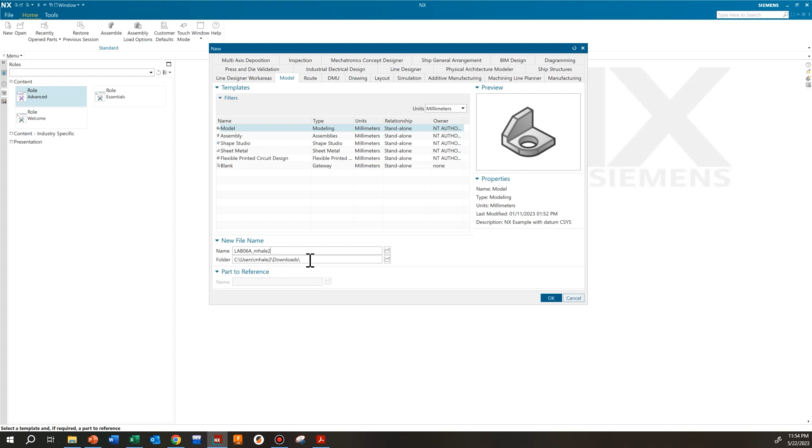Make sure that you have NX in the advanced role. We'll go to new model. It's going to be a model. We're going to be in millimeters. And this is going to be lab 06 A underscore mhale2. So for this one, we're going to do a model and a drawing. So make sure that you label your files correctly and save it to a location you can access later. And we'll hit OK.

All right, so we're going to create a sketch. And I want to start on the front plane. Gonna hit OK. And we're going to start sketching from this view here.

So I'm going to start with this large circle, and the 76 millimeter hole I'm going to save for afterwards, so we're going to do that with the hole command. Same thing with this 20 millimeter hole through here and the 28 millimeter hole in this orientation. Those are all holes, and we are going to use the hole command for those. So we'll start off with this, and then honestly, I'm going to move around and then add things in as we go.

Well, let's go ahead and start doing this. So I'm going to create a circle with the center of the circle to be at the origin. It's a diameter of 116.

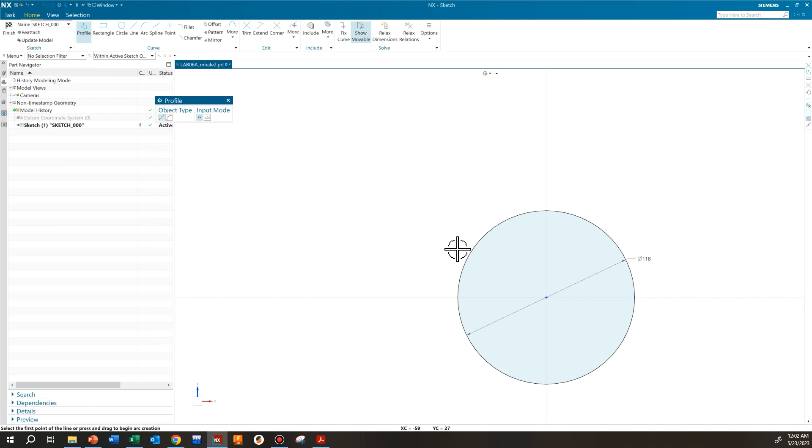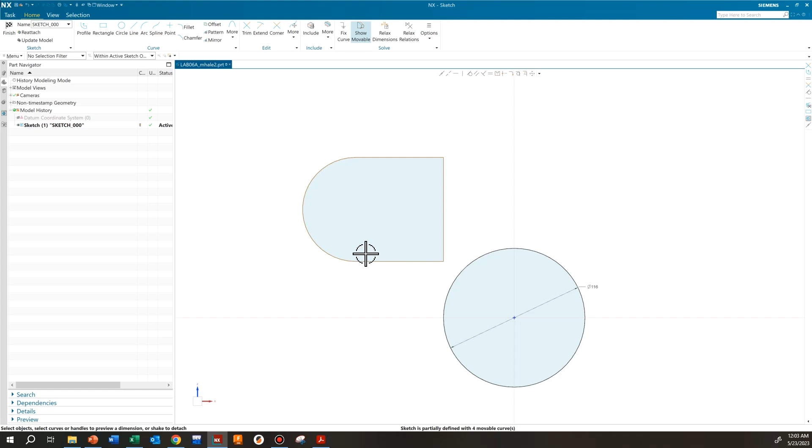And then over here we have this area here that's connected with this webbing, but I'm going to go ahead and draw this first, just somewhere over here. And I'll dimension it.

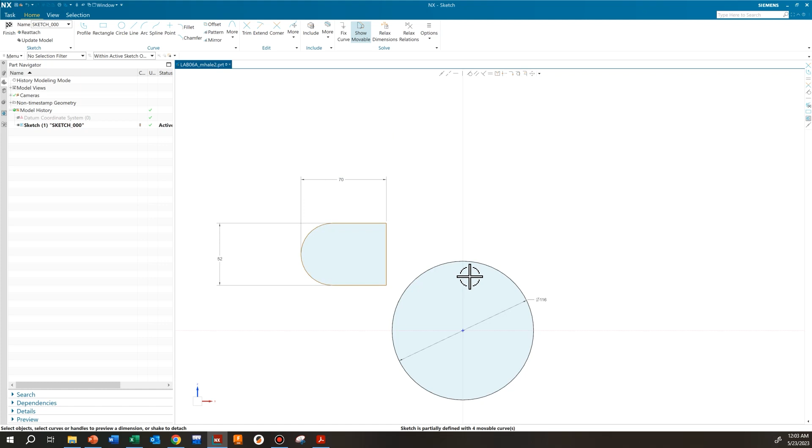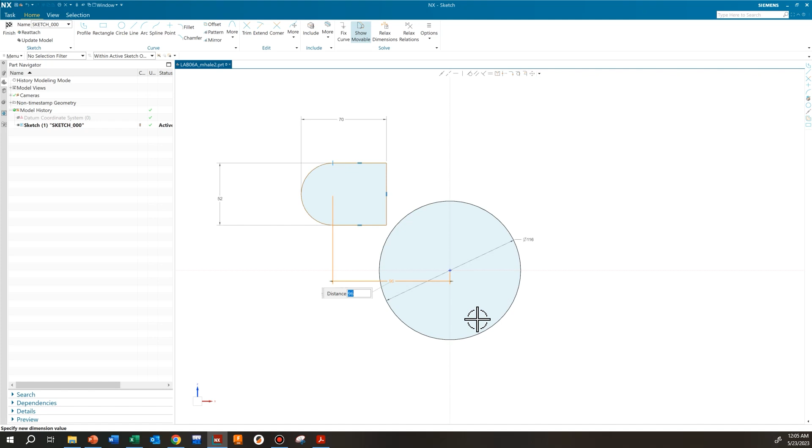And then I know it's somewhere over here, and that from here to the center of this arc, this is 96. And under the height, is 56.

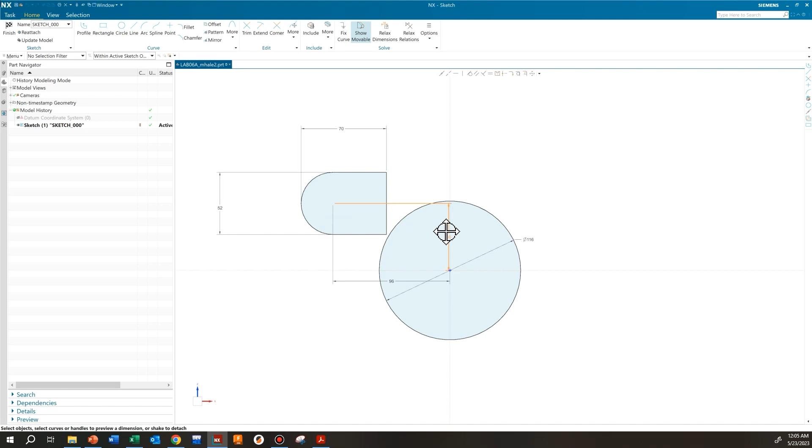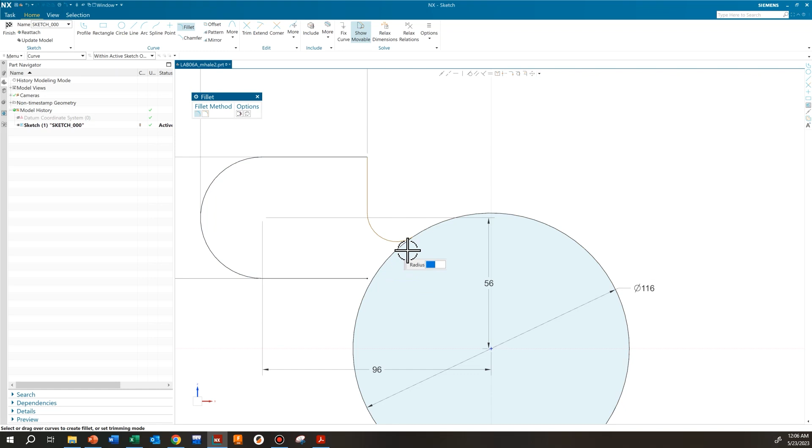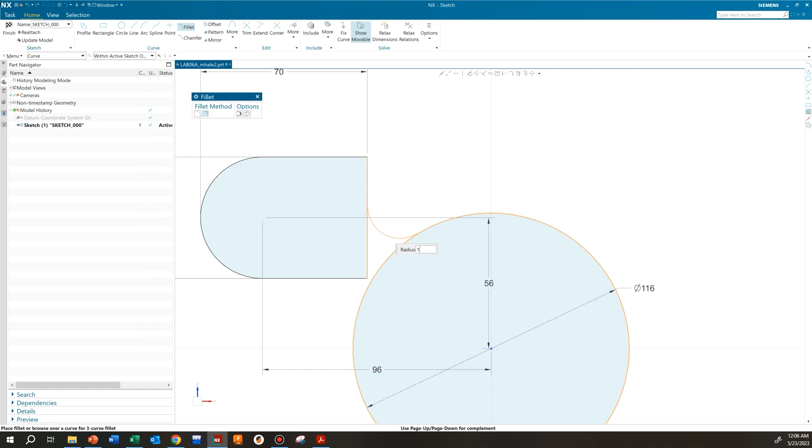And we have these R16 fillets that are right here. So if we go to the fillet command, we have a couple of options we can choose from, a couple of methods. So the first one is trim and untrim. So if we trim and select our components, then it's actually going to delete our lines that we've created. That is not what we want. What we want is the untrimmed. And then we can come in here and select - we have a 16 radius fillet on both sides.

Now we've got most of this side done. We need to come back and address a couple of things before we're done with the sketch, but I want to move on over to this side because we have this top line that extends over, and we have a whole bunch of dimensions here.

So we have this virtual line that's going through this center. You can see we have this center line here, and we are referencing a lot of stuff on this center line. So what I'm going to do is I'm going to first draw this center line, so then I can reference everything off of it. I know the center line is 172 millimeters away from our origin, and we can go from there.

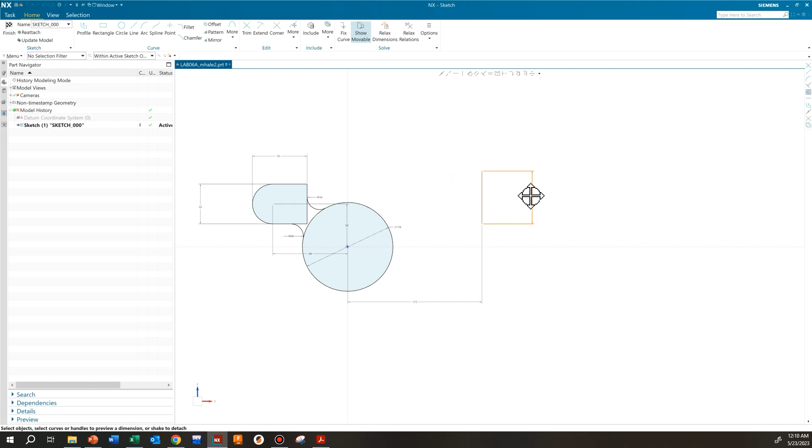I'll do a line, just somewhere over here. And I'm going to say that it is 172 millimeters away from our origin. And this is going to be reference geometry. So I'm just going to go ahead and say that it is not 703, it is 70 millimeters long.

And I will position this - if we look back at our drawing, from the origin to the top of this section is 64 millimeters. So I'll go ahead and position this, that point to the origin.

As 64 millimeters. And I'll go ahead and turn this into reference geometry.

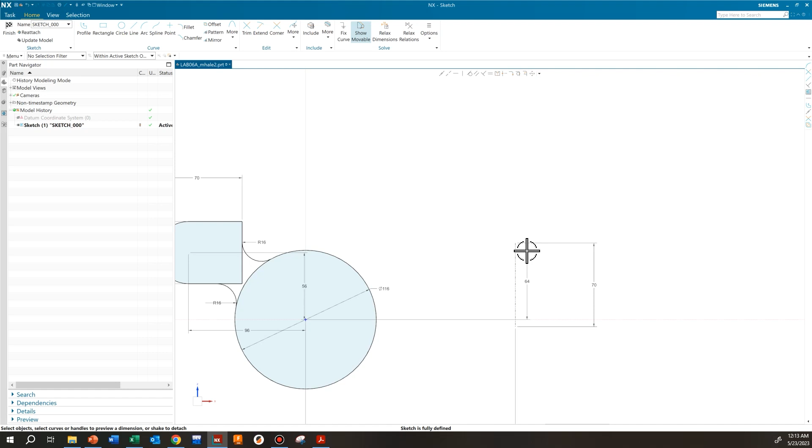Now we can make our line from this top point through that reference geometry that we just made. We're told that this line continues on, and there is a virtual intersection that is 6 millimeters from the top of this point to where this line intersects. We've already positioned that top point.

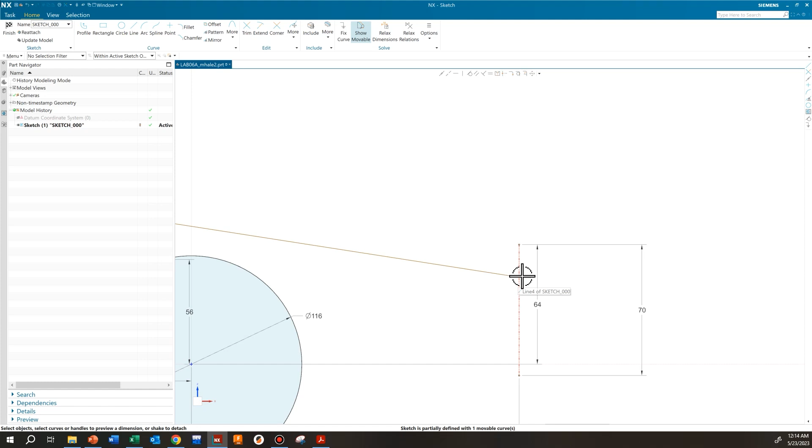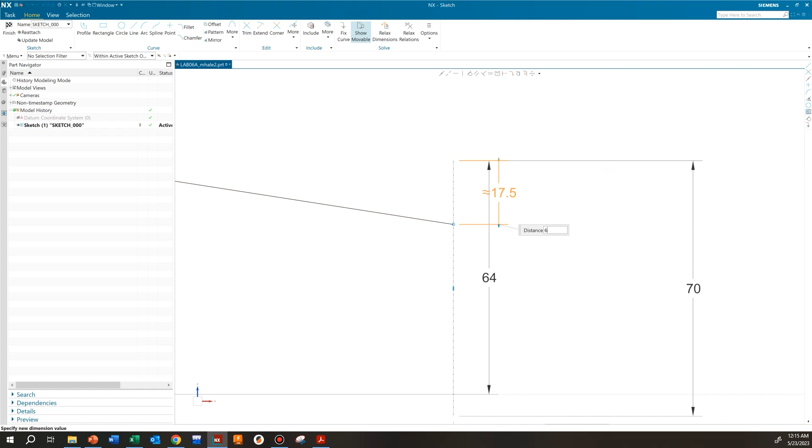So we will trim this, and we want this endpoint. Make sure that we get the endpoint, to the point, the top point of the reference line. We want this to be 6 millimeters. Make sure that you get the endpoint, otherwise you might get a dimension that is perpendicular to this line.

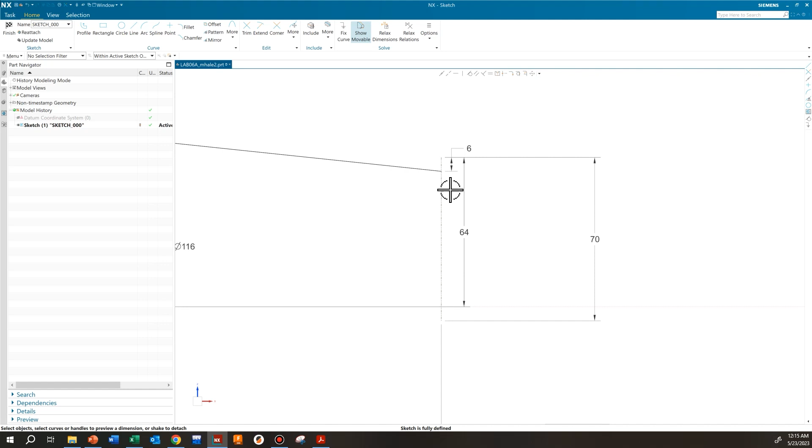We don't want that because that's going to be at a diagonal to this point. We want the 6 millimeters to be on the same axis as this point. So we need to trim off the line, have an endpoint, select that endpoint, and then select the top of the reference line. So we have this line going through.

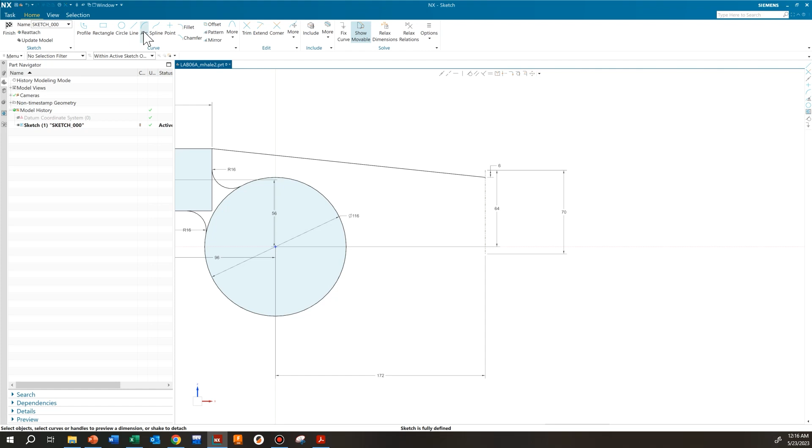Now let's look at this section here. We have the center line that goes through, and we're told that the center line of these two lines here crosses 16.4 millimeters from this top point. So we can create another line. We want the center here, and I'm just going to cross through that reference point.

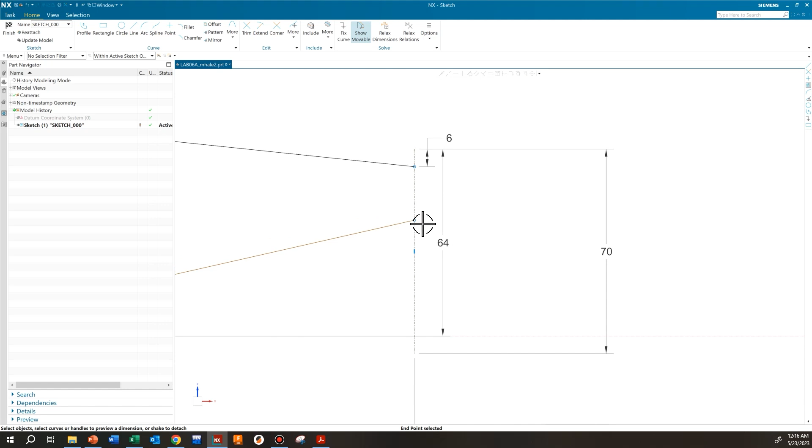I'll come through, I'll trim this off. And just like what we did up here, we're going to do the same thing. We want to make sure that we get the endpoint, or the start point of this line. And this is going to be 16.4 millimeters.

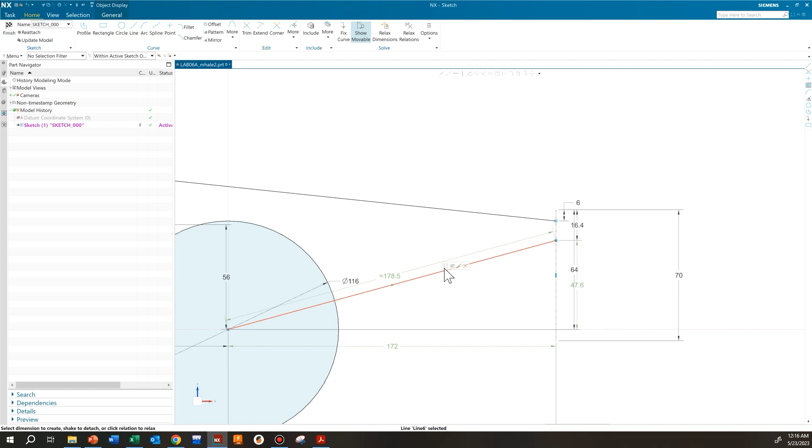This, however, is another reference line. We look at our drawing. This is the center line that's actually dimensioned from this edge here. And then we're told that the actual lines are 10 millimeters away from that center line, 20 millimeters total. But that center line goes through the center of that 20 millimeter beam right there. So to create these lines...

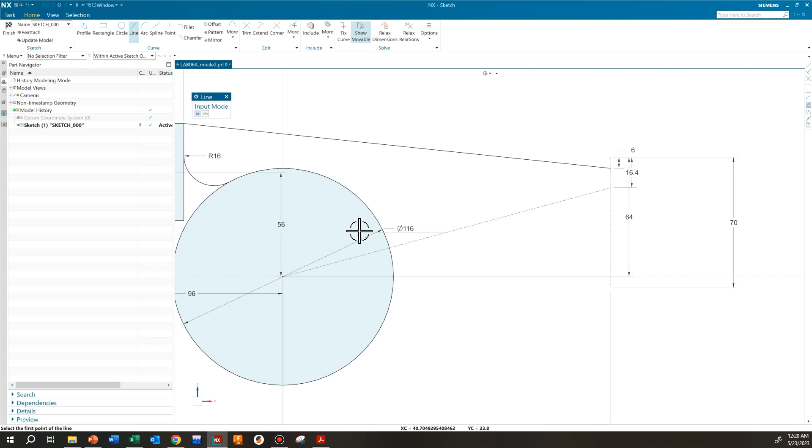What I will do is I will create lines. Again, I can spend the time to try to get the line started on the edge of the circle, or I can just come in and start our lines from the inside of the circle, and we'll use the trim command to trim off the excess.

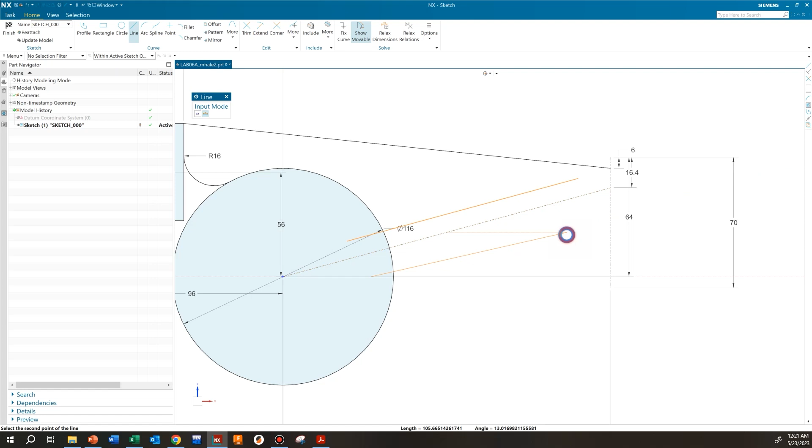So I'm just going to get the line started and make it look just like that, so it starts from the inside of the circle and doesn't go past our reference line. Same thing for down here, start inside the circle and then I don't want it to go past our reference line.

So then I'm going to come here to our constraints, and I want to say make parallel. I just want to make sure that the lines we created are parallel with our reference line. So I'll choose one of our lines and I'll choose the reference line, hit apply. I'll choose one of the lines, the reference line, and then hit OK, just to make sure that both lines are parallel with that reference line.

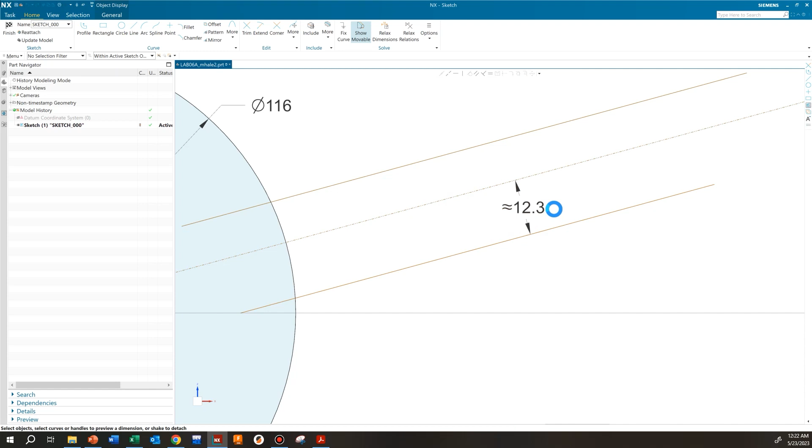Then I want to dimension where these lines are going to be located at. They're both going to be located 10 millimeters away from that reference line. So I'll click on the reference line, click on one of the lines, 10 millimeters. Same thing on the other side. We've got 10 millimeters.

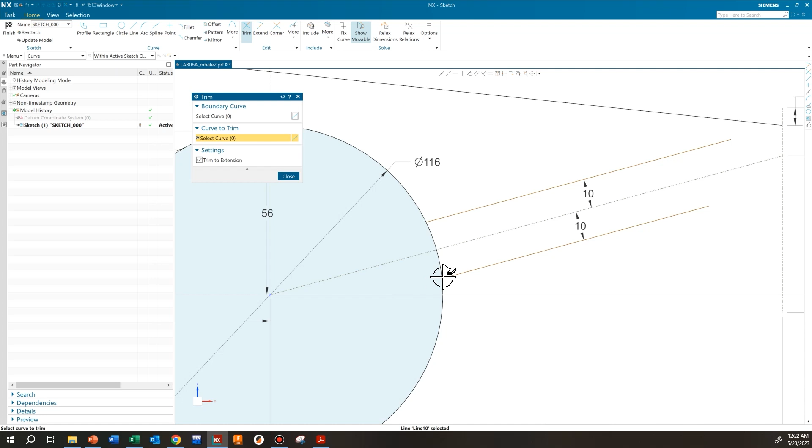And then now what I want to do is I'm going to come up to the trim command and I'm going to trim off these lines at this arc. And then I'll come up to the extend command and I'll extend these lines out.

Now let's look back at our drawing.

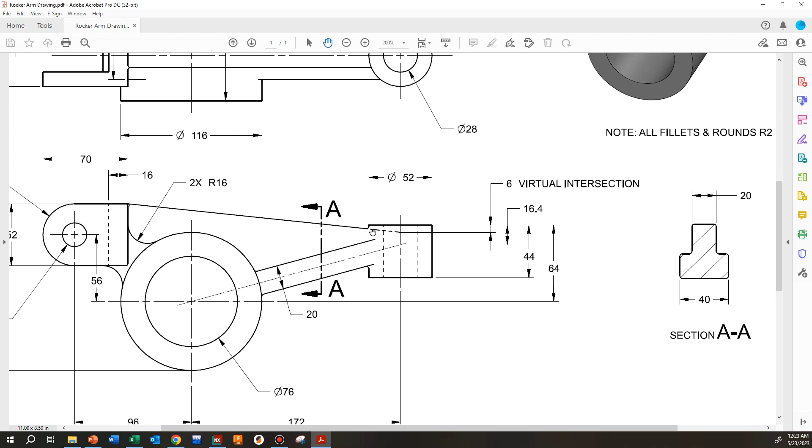So we've got the circle, we've got these fillets, we've got this feature line, we have these lines. We don't have this, but in this view we don't really have any dimensions for that. That's all in the top view. But in this front view, the only other thing we have is this hidden line.

We are actually going to go ahead and draw that in, because the sketch we've created right now is going to be in the center of our part, and we're going to symmetrically extrude the features from this sketch. So we need this line so that we can dimension this feature. We're going to draw this in, and that's going to be it for this sketch, and then we can start extruding some of these features.

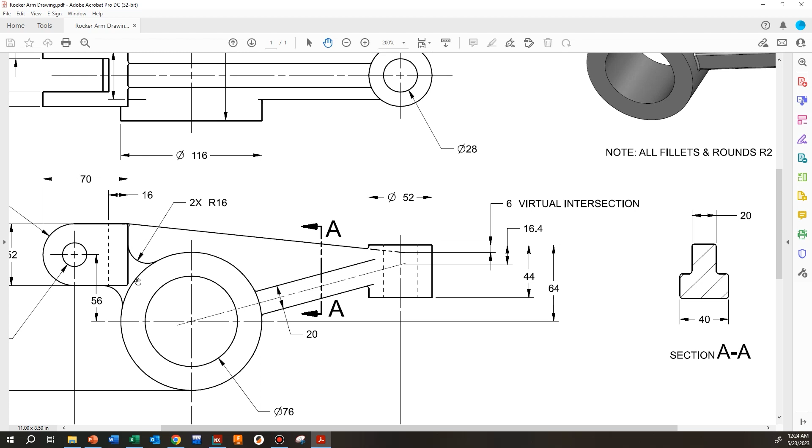So we want a line that is 16 millimeters from this edge. Go and draw that line, dimension this so that it is 16 millimeters.

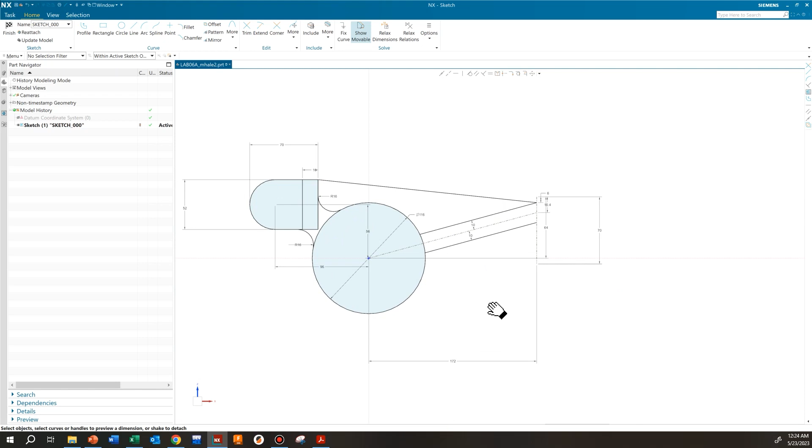All right, so the last thing we need to do is come over to the right part of our model. Right now we don't have a defined boundary, and we need one. So I want to create a line that connects this top line to this bottom line.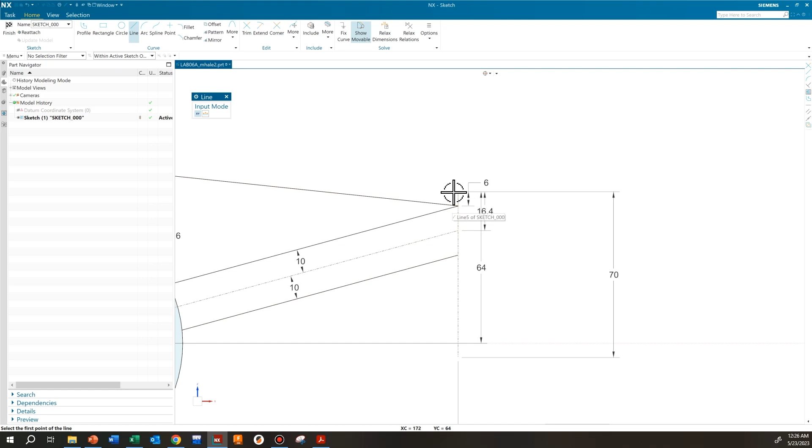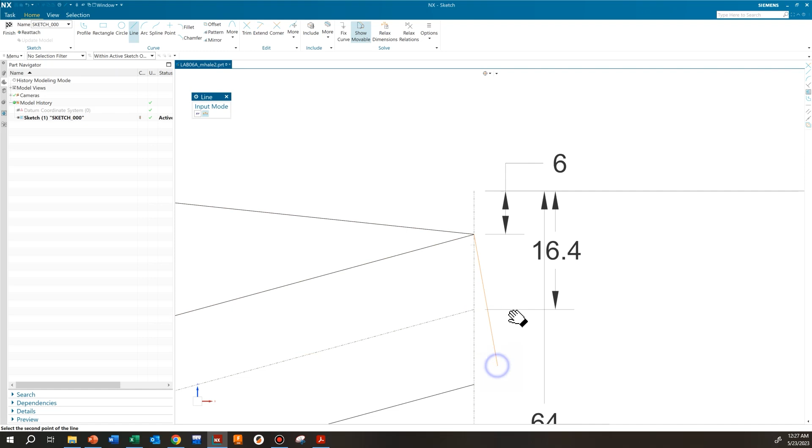So I'll come over here, and I want the endpoint for line 5. It's important to grab that line because that's the top one. And then there's line 9. Then I'm going to come down here to the endpoint of this line, endpoint of line 10. And that's where we want to have our line.

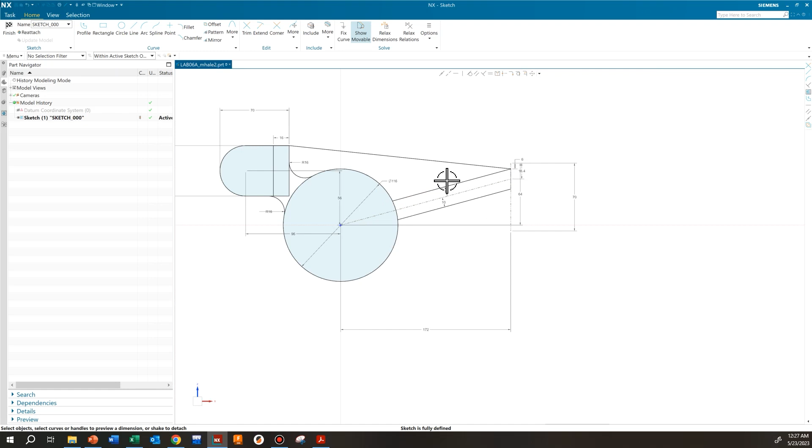It doesn't look like anything has changed, but we will be able to actually create boundaries now. So we can go ahead and finish this sketch. And now if we look back at our drawing, we can move up to this section and this section.

So our sketch is essentially down the center of this part. We're going to make symmetrical extrusions, and we're also going to mess with the starting point on some of the extrusions, which we haven't done before.

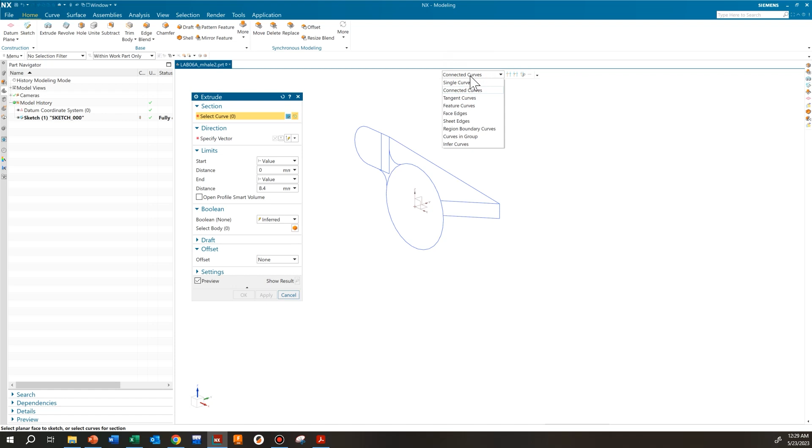So let's start with this 116 diameter round piece that we actually started our sketch with. We are going to go to extrude, but we're going to do something different. I can select the round section with just connected curves, but that's going to become difficult later using this method. Instead we can select what we want to extrude using region boundary curves, and that allows us to actually select the section we want. See how I can select all of the sections that we've made?

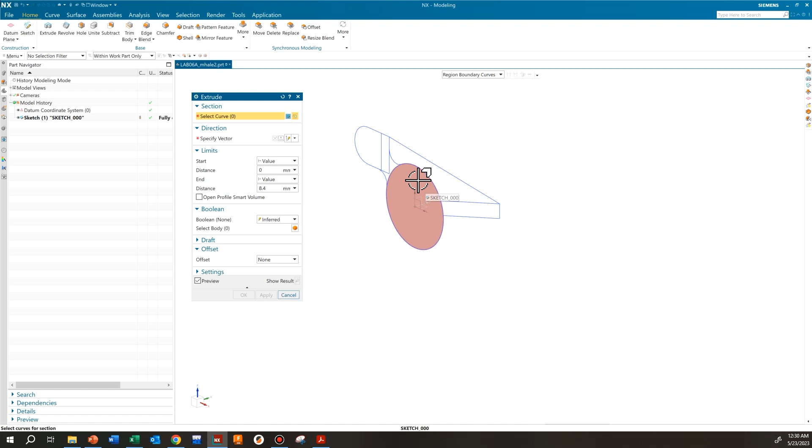So we can go in and specify for this boundary how much we want to extrude, and this is how we're going to extrude all these individual components. We're going to start off with our circle, and remember, we want a symmetric value here. It's going to be 76 millimeters. Just go ahead and hit OK.

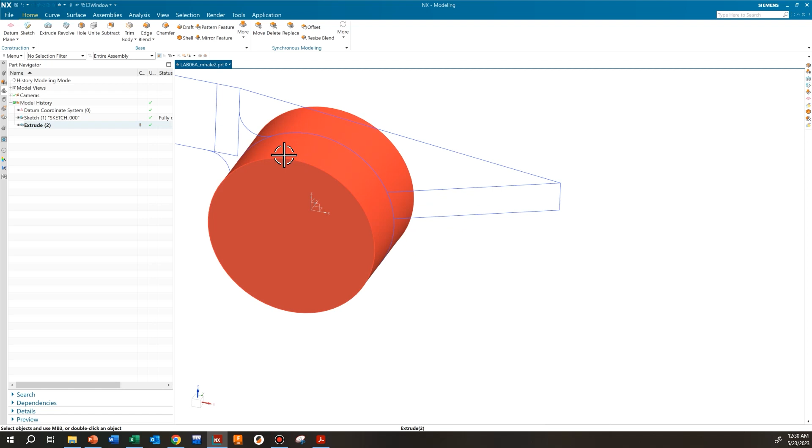And we're going to move on and kind of piece this all together with the extrusions. So we got the 76 millimeter. This webbing, the fillet that we did, is the 40 millimeter.

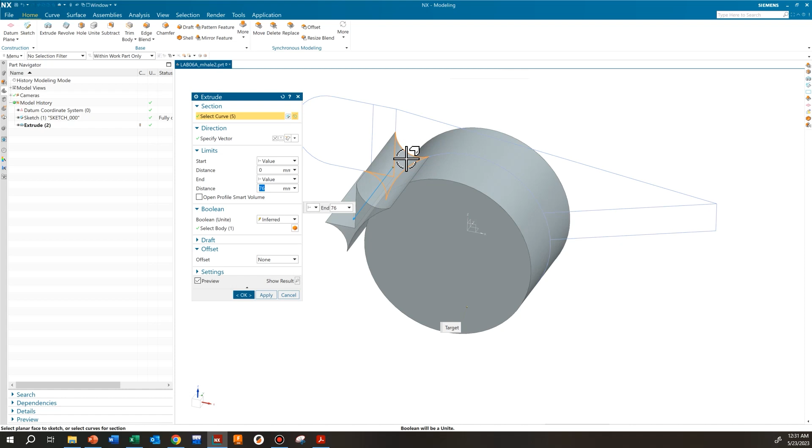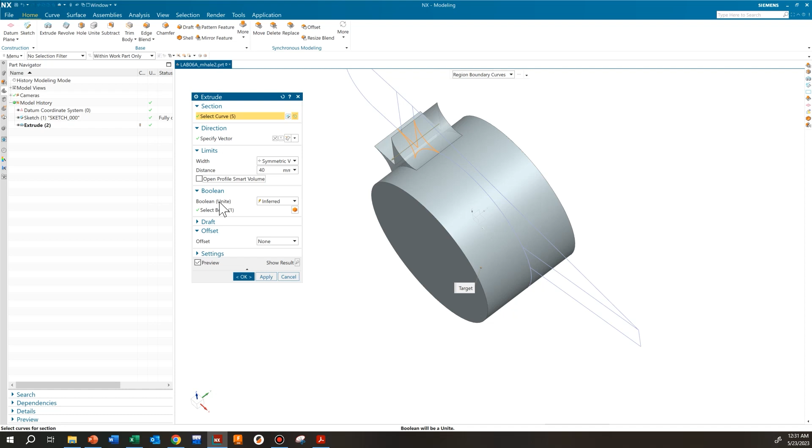Go back to extrusion, we're still in region boundary curve. We want this to be symmetric. This is 40 millimeters. We want to make sure, though, that we are uniting all these together — if we don't unite, we're actually making multiple solid bodies. So we want to make sure that we are uniting all these together. Hit apply.

This web section here, which is going to be this top area, and then this beam that we created, is actually dimensioned over here in section A. We have a section view that's split right here, so we're actually seeing this top webbing area and then this bottom beam that we have. So the top webbing is 20 millimeters and the bottom is 40.

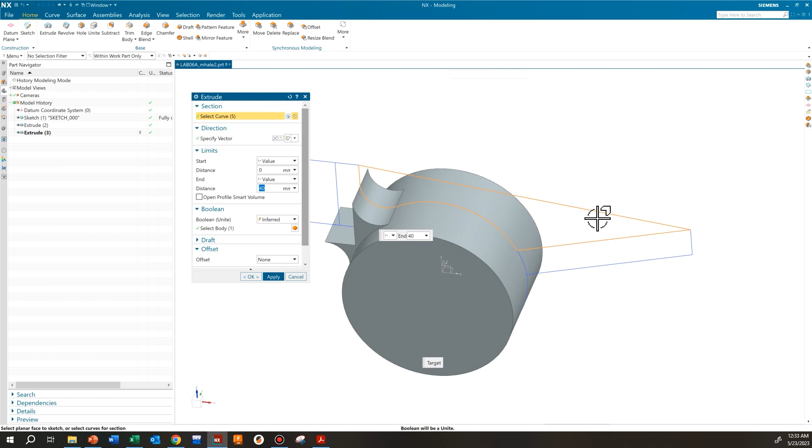We can select this top web right here. Again, we want to go to symmetric value — this is 20 millimeters. Make sure that we're uniting. Apply.

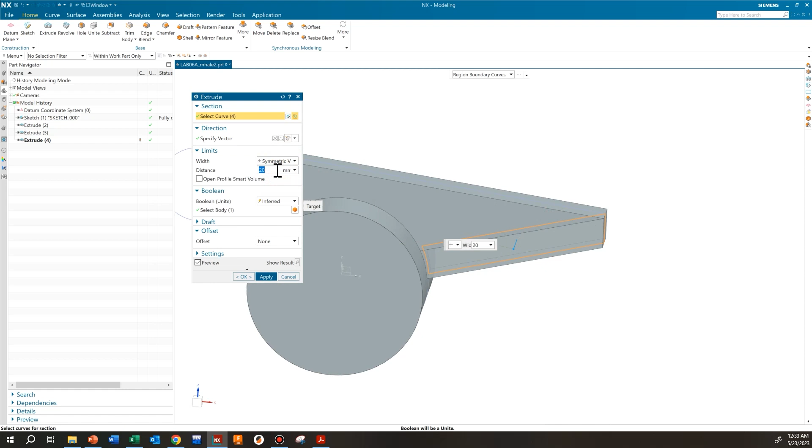Select the bottom, symmetric. This is 40. Hit apply.

And now this area is where things start to change a little bit. This is why we specifically wanted to put in this rectangular area, and why we wanted to put in this line, because we have this dimension up here. So we have this cutout area.

The edge of this cutout area is that line that we put in. So this whole section right here is still kind of what we've done before, but we don't have an exact dimension for it. What we know is that we have a 12, a 28, and a 12, and that is the total distance that it's extruded. Just like we've done always, when we have to add things together or divide things, we're not going to add these numbers together outside of NX.

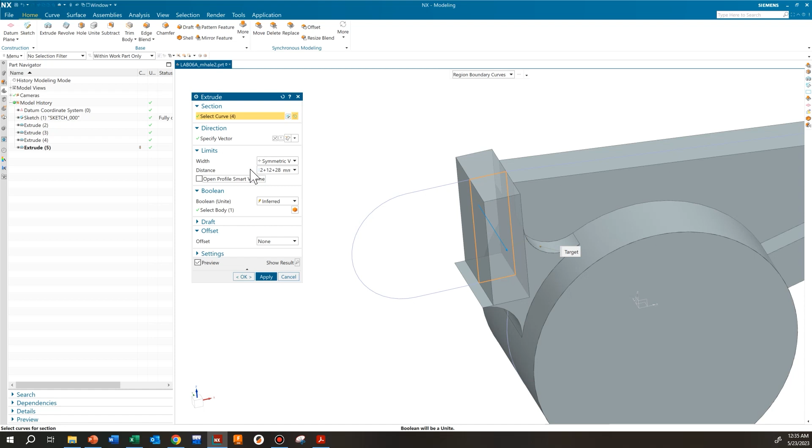We're just going to put them in NX and have it add it for us. That way, everything we've done is documented. So I'm going to choose this section here, symmetric value, and I'm going to add 12 plus 12 plus 28. Make sure I'm uniting, and I'll hit apply.

And then for the pieces that are on the top and bottom here, again we're going to do the same thing. We're not going to do any math outside of NX, we're going to leave it all up to NX. We know that this middle section has a 28 millimeter gap, but we know the thickness of each of these sides is 12 millimeters.

So we're going to change our starting point to be half of 28 millimeters. So the starting point is going to be 14 millimeters away from this middle section, and then we're going to go to the 12 millimeters thickness. Then what we're going to do is actually just mirror this section. So rather than making this symmetrical, I'll select the curve.

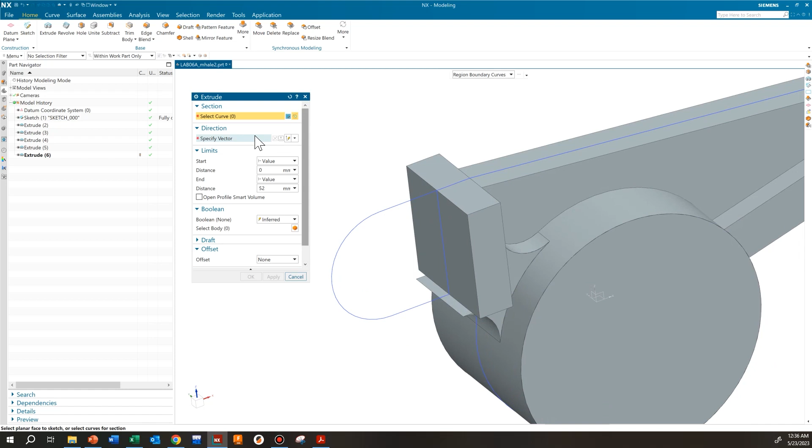My starting point is going to be 28 millimeters divided by 2, so that's the 14 right there. The value that I'm going to go to, it's not going to be a value, it'll be until extended. And I'm going to select that wall that we just made, and I'm going to hit OK.

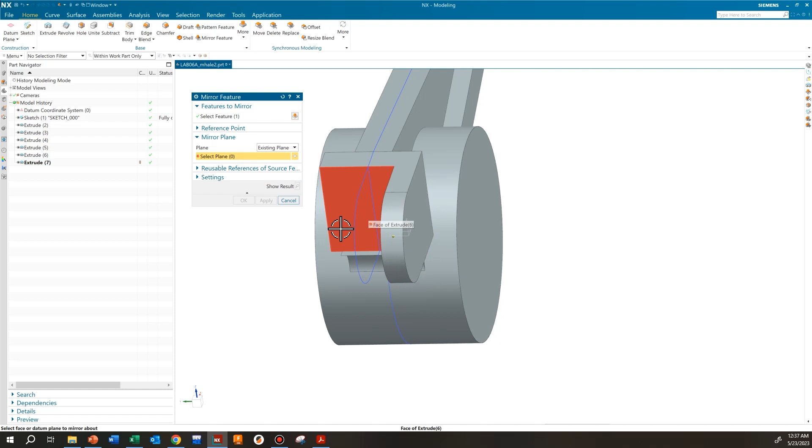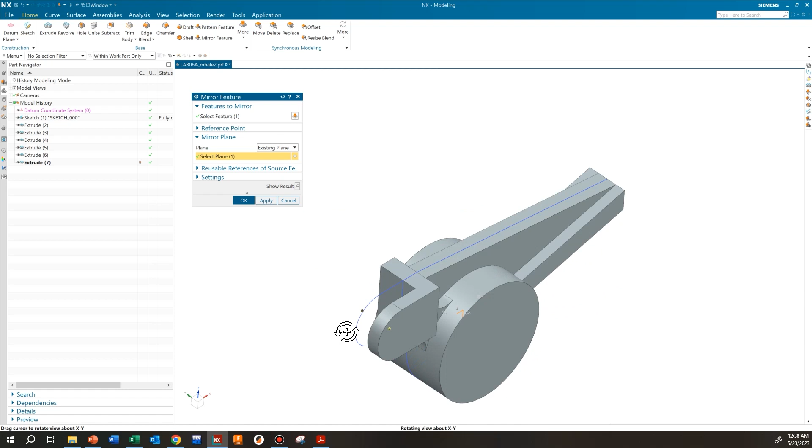Because then what I'm going to do is I will mirror this feature, and the reference plane is going to be the plane that we drew the sketch on, so it's going to be that XZ plane. And I'll go ahead and show the results, make sure that everything is correct, and I'll go ahead and hit OK.

All right, so we've done everything that we can do as far as the extrusions go. The other thing that we need to do is make this feature here. So we're told that the outer diameter is 52 millimeters and the top of it is 64 millimeters from the origin.

There's lots of ways to do this. What I'm going to do is actually create a plane along the bottom here, and then we can sketch on that plane and extrude it up.

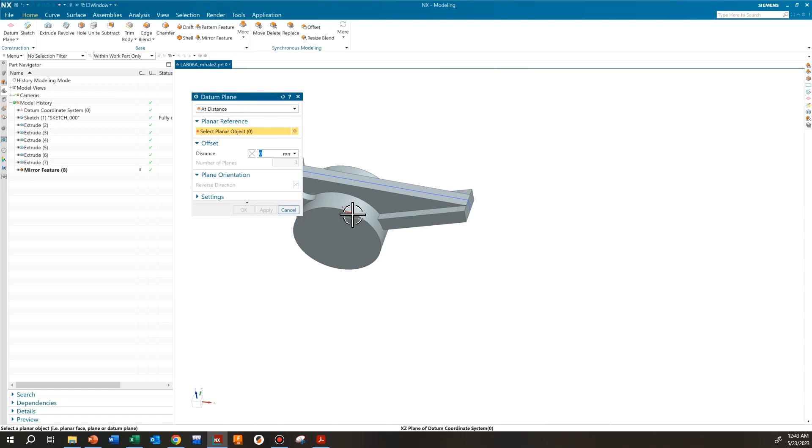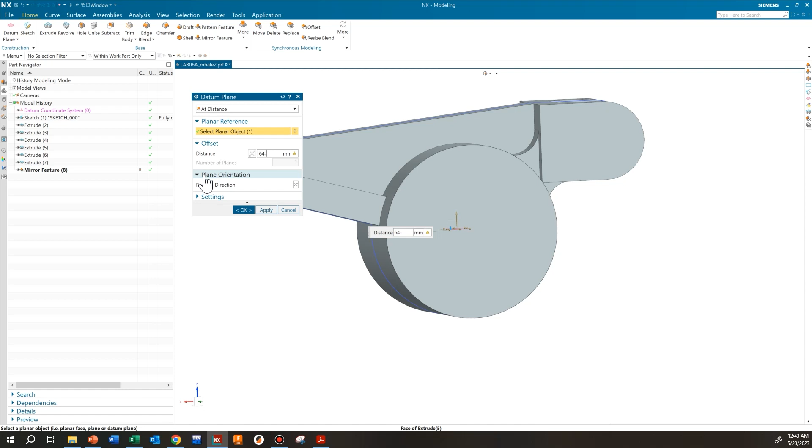So I'm going to create a datum plane. I want to add a distance. The reference plane is going to be our XZ plane, and the distance that I want is 64 minus 44, so it'll be 64 millimeters minus 44 millimeters.

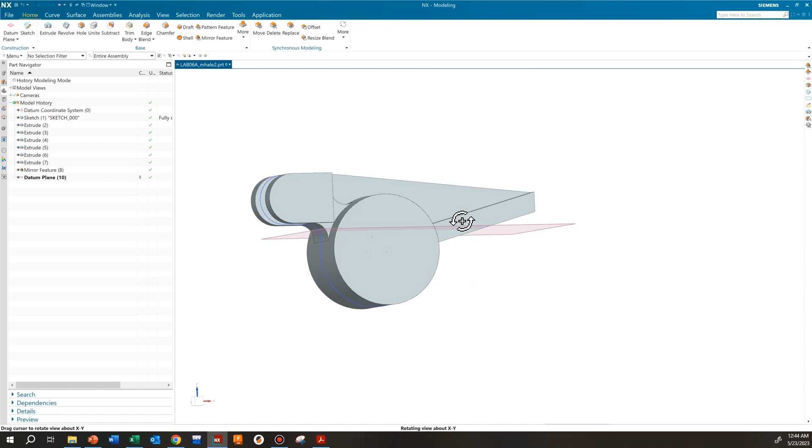And I'm going to go ahead and enlarge this just so that I can see it a little bit better. So now I have a plane created at the bottom of our hole over here, or this section of the rocker arm. Now I'll go ahead and create a sketch on that plane.

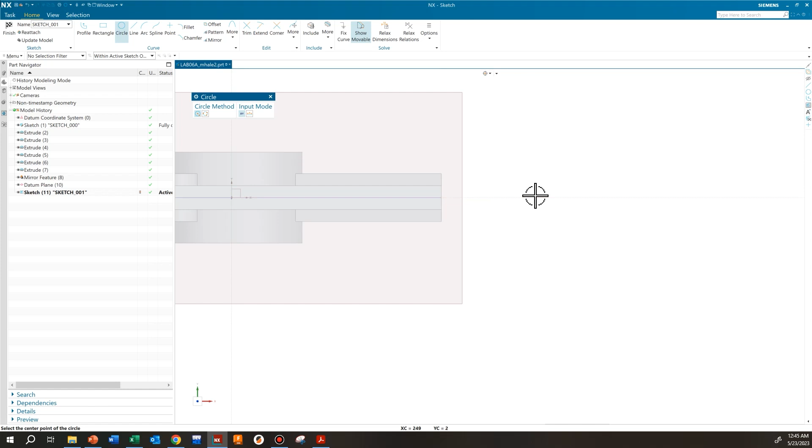I'm going to start with a circle, and I want the circle to be on this horizontal axis right here. See how it's snapping to that axis? I'm going to go ahead and constrain it to that. Look at the drawing, it's 52 millimeters in diameter, so change this to 52.

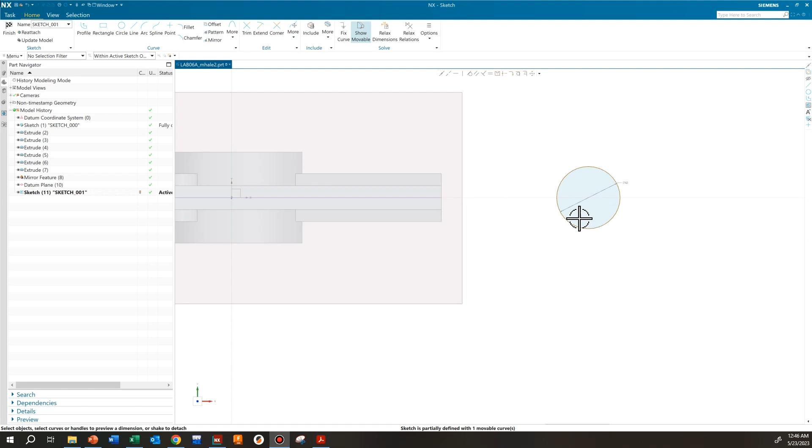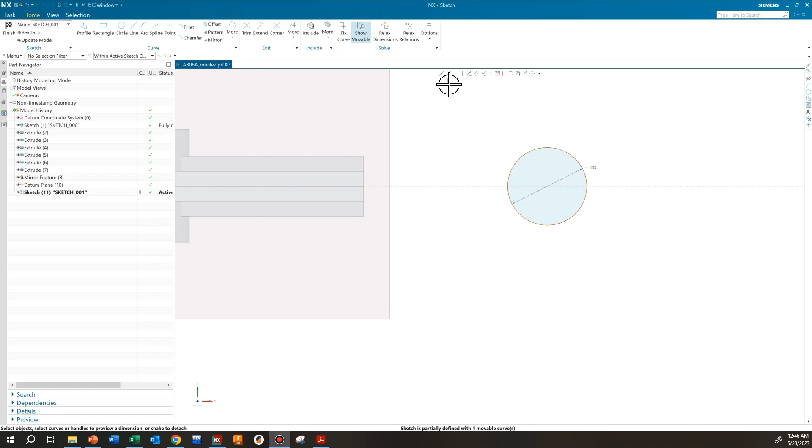Now what I want to do is constrain the center of this 52 millimeter circle to be on the same line that is created here. Remember, we dimensioned this point already to be where the center of the circle is located. So what I'm going to do is a make coincident, and I want to choose the center of the circle, and then I want to select one of these lines.

If you cannot select this line, make sure that you are within work part only. If you're within the active sketch only, you won't be able to select it. So we want to be within work part only, and we can just select one of those lines and hit OK.

So we have been constrained to the horizontal axis that's right here, and then also we made a coincident on this line that's already been dimensioned where this circle needs to be. The sketch is fully constrained, so we can go ahead and hit finish.

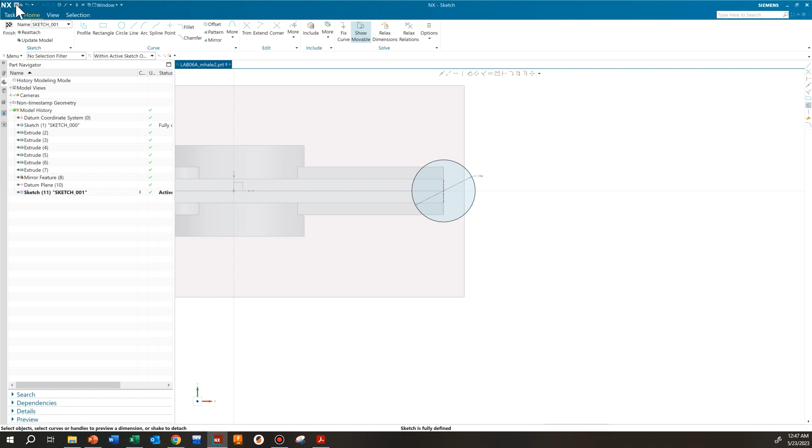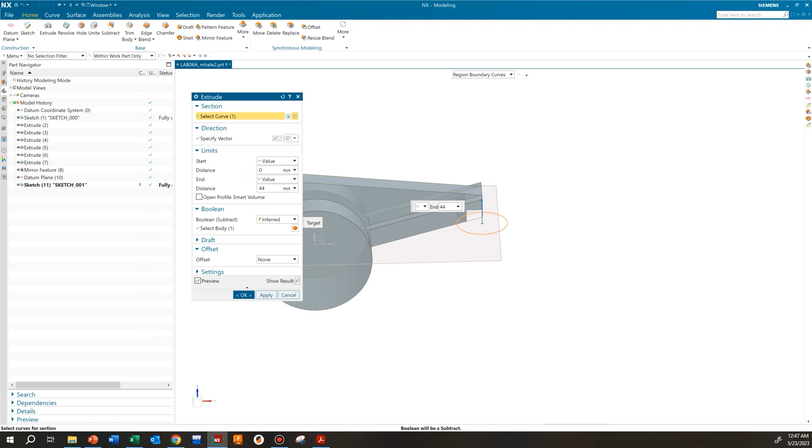And we can extrude this. Our start value is going to be 0, and then the distance we actually want to go is 44 millimeters.

Notice that we are subtracting. We don't want to subtract. What we want to do is actually unite here. We'll go ahead and hit OK.

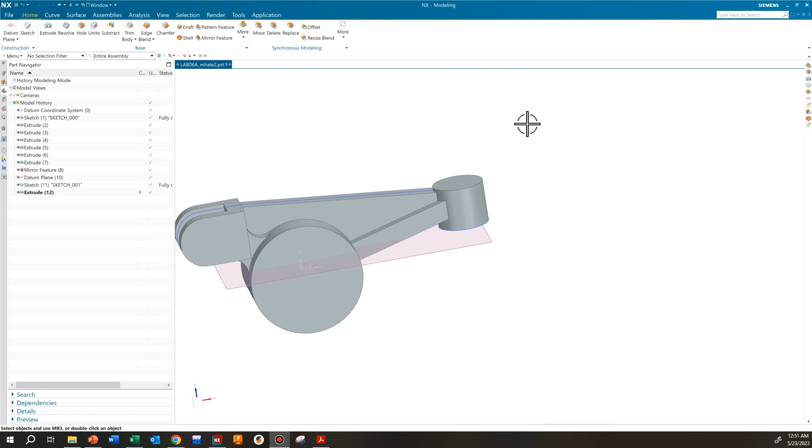Now we've had a whole bunch of different extrusions where we had to unite a lot of geometry, and there's a lot that could go wrong if we overlooked one of the unites and accidentally did a none. We'd actually have multiple solid bodies here.

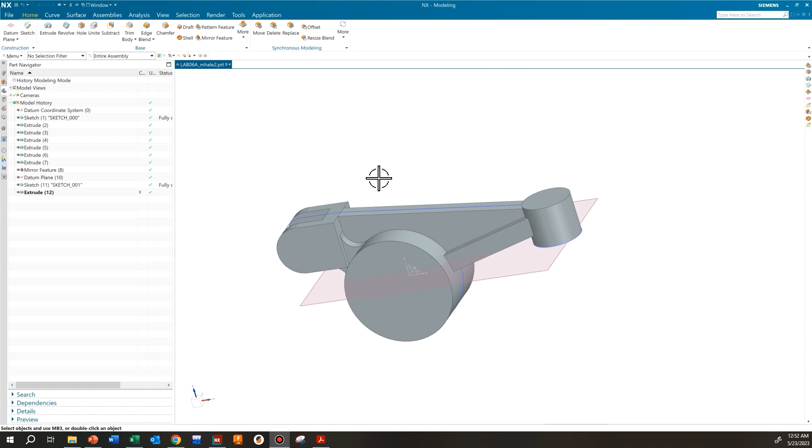A quick check for whether we have one solid body or multiple is to go up to unite. If all of our geometry is selected when we go to select the body, then we actually have one solid body. However, if when we hovered over our part one section was grayed out, or maybe multiple sections were grayed and we weren't selecting those bodies, then we would have multiple solid bodies.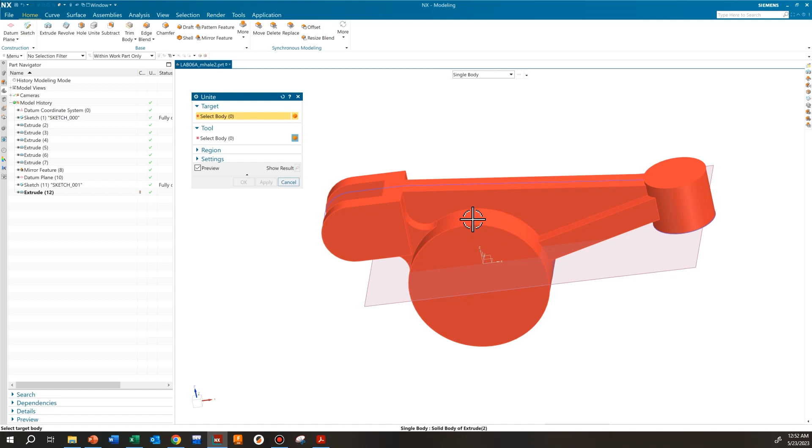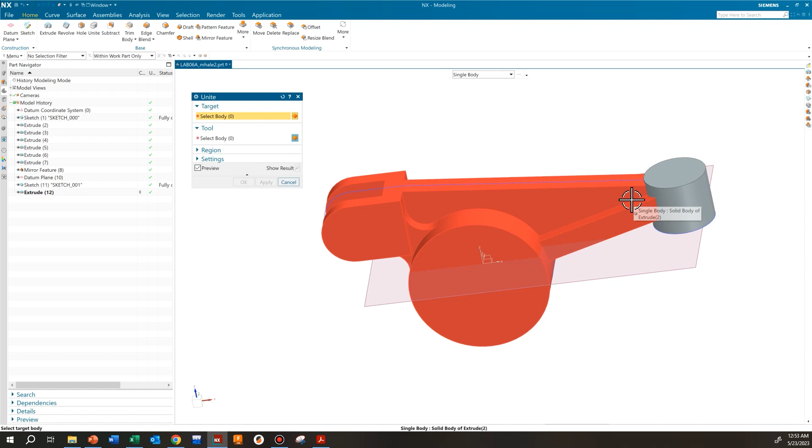So let's say that last extrusion we did - let's go back - and we accidentally hit none. Right now it looks the exact same, but when we come over to unite, see how it's not being selected? That's an indication that we have two solid bodies here. So that's a good check to see whether we actually have one solid body or multiple.

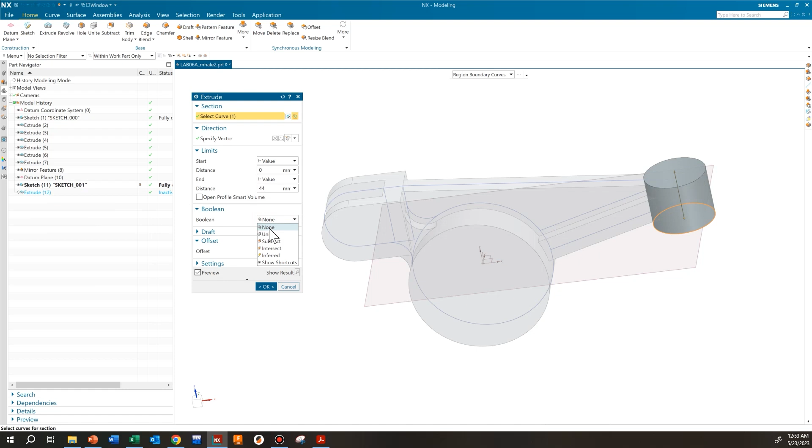Now, of course, we want to make sure that we are uniting all of our geometry together, because all we're doing is adding to our solid body. We are not creating multiple solid bodies here.

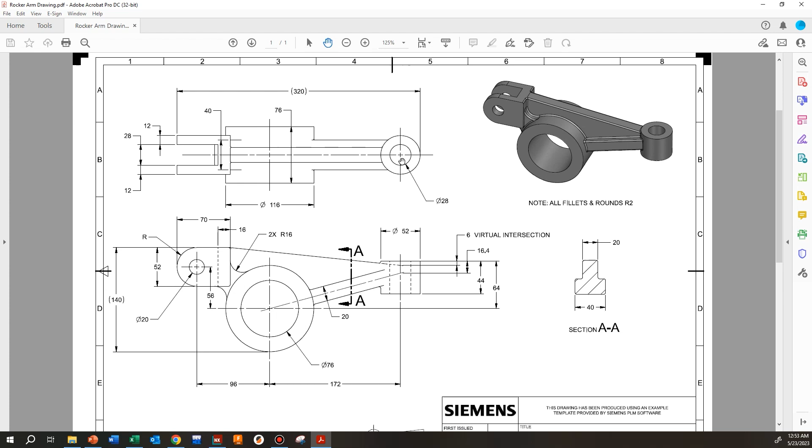So the next thing we need to do is add all of our holes. We've got a 76 millimeter hole here, a 20 millimeter hole, and then a 26 or 28 millimeter hole. So let's go ahead and create all of that.

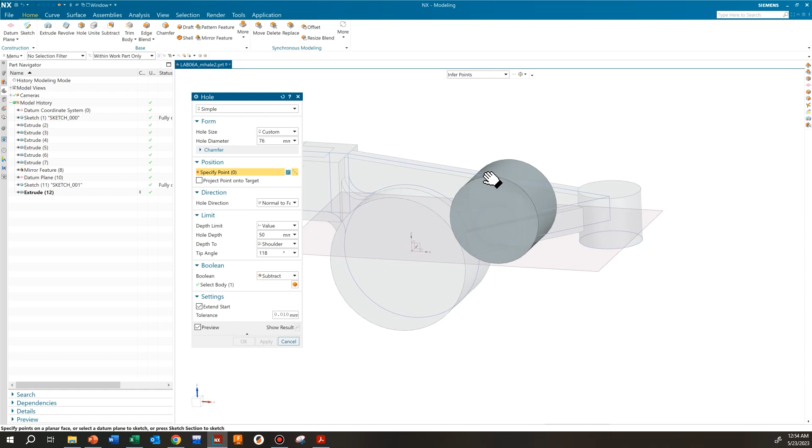So we'll use hole commands for all these holes. This is a 76 millimeter, and a simple hole is fine. We don't need to go into a sketch because all we're going to be doing is the center of this hole, so we can just approach this hole and constrain it to the center. This is going to be a through hole. We can hit apply. Move on to the second hole, which is going to be here.

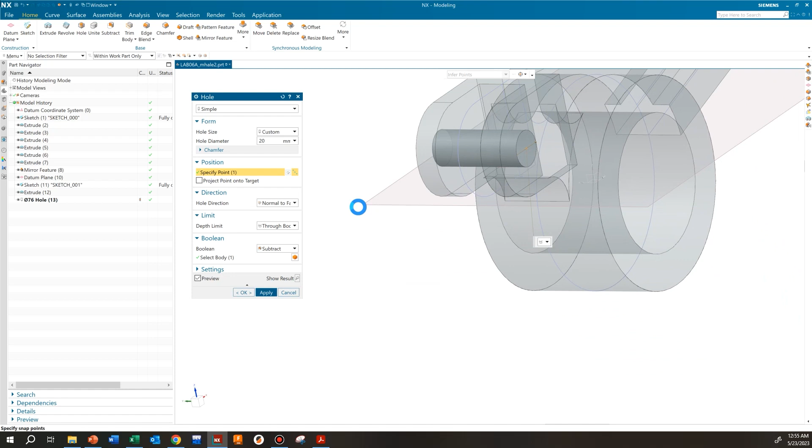This is a 20 millimeter. We can approach this radius, wanting to be at the center of that radius, and again this is going to be a through hole. So the cool thing about this through hole is that it's actually going to split - it's going to go across the gap and continue on, which is what we want. So we can hit apply.

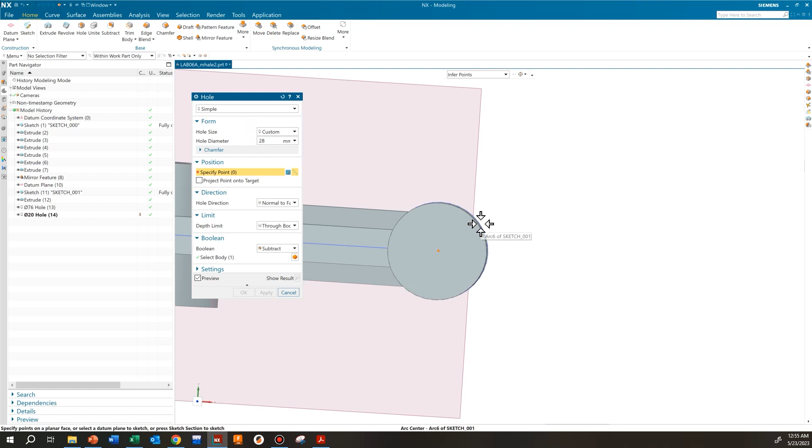And then the third hole is going to be 28 millimeters, and it's going to be at the center of this feature. Again, another through hole, and we'll hit OK on this one because we are going to be done with our holes.

Now, the last thing we need to do for the model is we have this note over here that all fillets and rounds are R2, and we have edge blends for all of this geometry here. So we need to add these edge blends to our part.

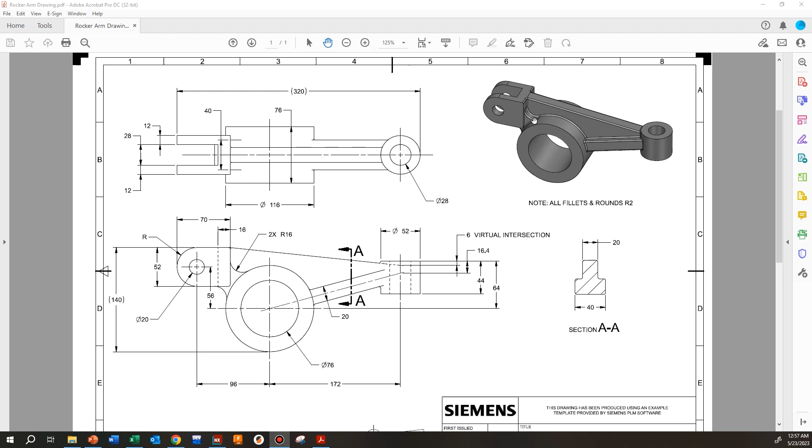All right, so now we want to add edge blends to the part, and then we will start the drawing. We'll warn you that some of the edge blends can be a little difficult to put onto the part, and if you come across these difficulties, I suggest you just try a different order. Sometimes there's no problems at all, sometimes there are problems - it all has to do with the order that you select the lines that are going to be edge blended together. So I'll quickly go ahead and do some of these edge blends, and then there'll be another video for the drawing section.

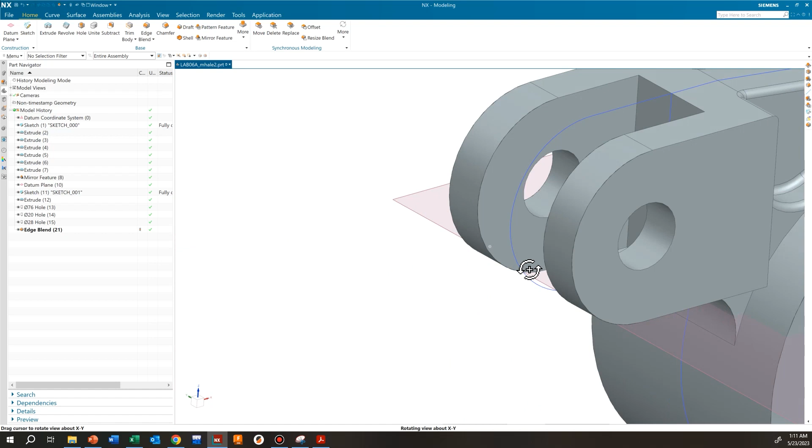All right, so once we have all the edge blends in, we can go ahead and get ready for our sketch.